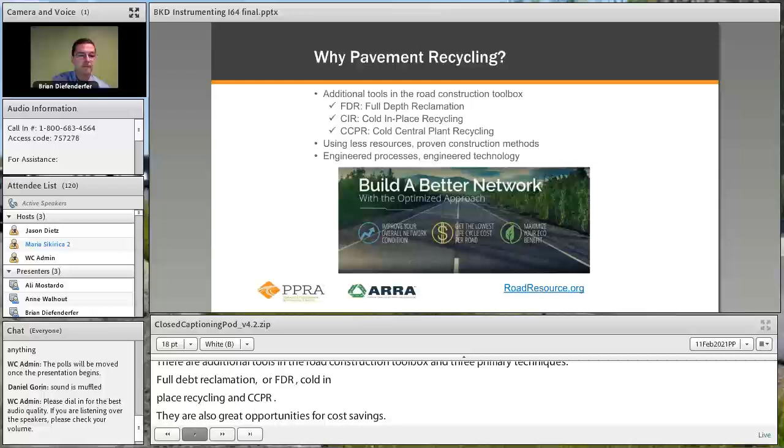As a summary of the three processes: full depth reclamation, or FDR, typically treats a depth of about 5 to 12 inches as a stabilized base layer, and can be used as an alternative to reconstruction. Cold in place recycling works a little thinner, with a typical depth of about 3 to 5 inches, and serves as an alternative to deeper mill and fill and partial depth patching in an asphalt pavement. Cold central plant recycling works in a layer of about 3 to 6 inches thick and can be used as a structural base layer. One thing I'll touch on during this presentation is that cold central plant recycling can be used to help recycle materials into a new roadway, and I'll show some examples of how that has been done.

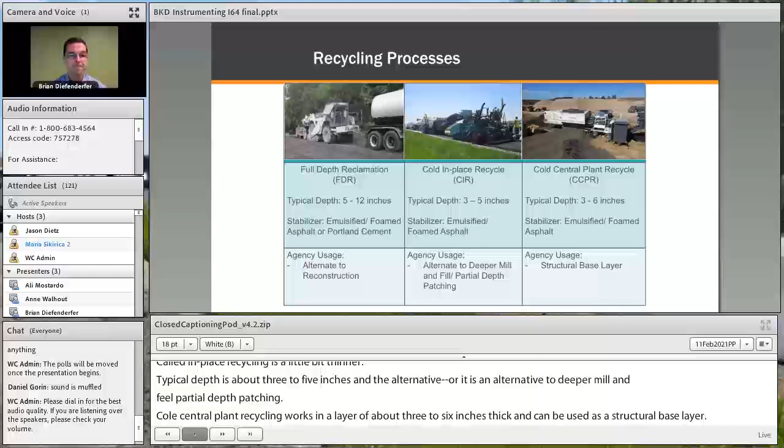Pavement recycling not only can be a cost-effective process, it's also an environmentally sustainable process. Sustainable development has been defined as something that meets the needs of the present without compromising the ability of future generations to meet their own needs.

What comes to mind when we think about this is reusing and recycling material before they're retired. Things we can be mindful of include the environmental impact, the cost, and the performance of these systems. My presentation today will touch primarily on the cost and the performance, but there are certainly sources in the literature that cover all three.

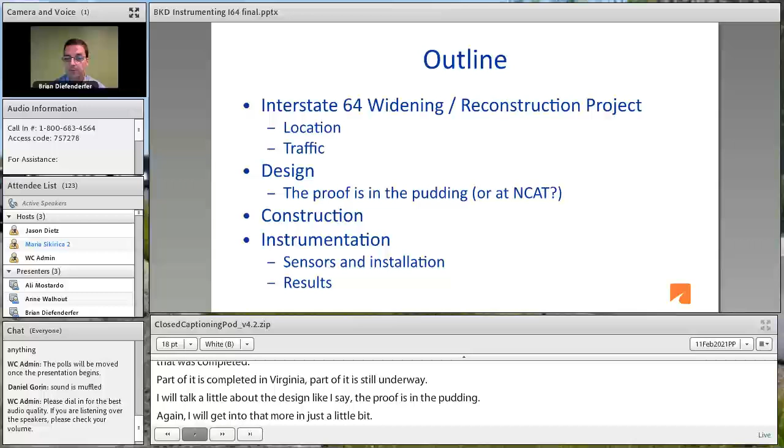A brief outline for today's presentation: I'll be talking about the Interstate 64 Widening and Reconstruction Project, a construction project that was completed in part here in Virginia, with part still underway. I'll talk a little about the design and how we proved the design - the proof is in the pudding, or in this case, at NCAT, the National Center for Asphalt Technology. I'll provide some examples of construction for this project, then talk about instrumentation, the sensors we used, how we installed them, and some preliminary results.

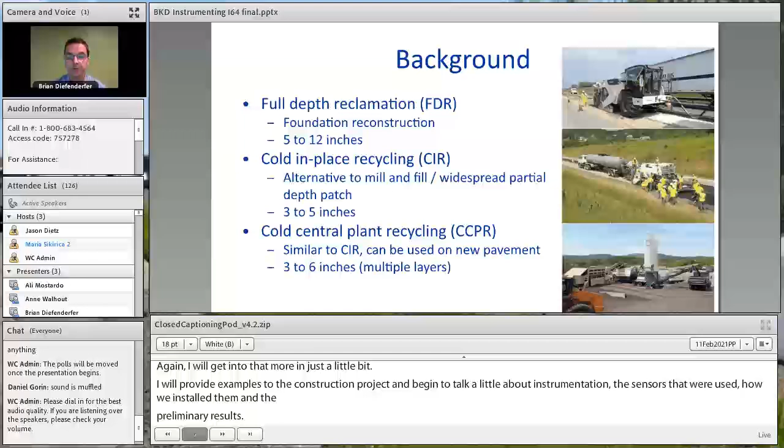As background, FDR, CIR, and CCPR are three recycling processes. I'll be touching more on FDR and CCPR. CIR is also a process that's been used in Virginia. There are many states using these processes in widespread applications, and I'll be going into more of those in a few minutes.

First poll question during the presentation: which recycling processes can be used to create multiple layers? I'll wait just a minute for the results to come through.

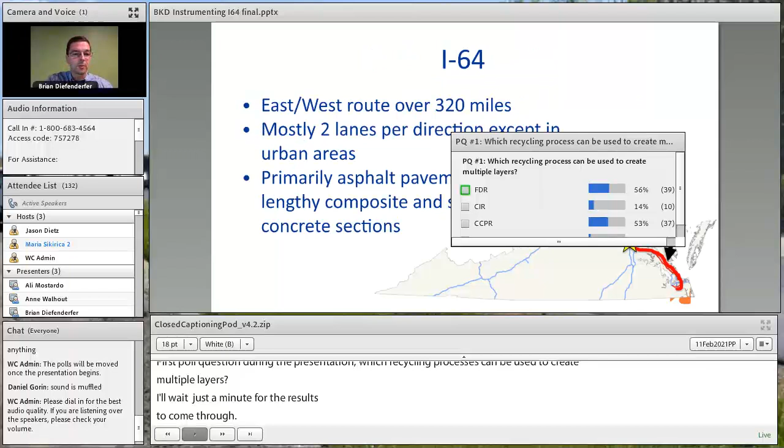Jason, I'm not sure why I'm jumping ahead, but anyway. No, you're good, hopefully everybody will see the results. And it looks like the number one that came in there was FDR for that answer, Brian. So are the slides jumping ahead for you guys, because they are for me? Yeah, they are. Somebody's tinkering with them.

So anyway, in terms of the three recycling processes, I see now there's a majority on the CCPR answer C, and that's the correct answer. CCPR can be used to create multiple layers. Typically with FDR and CIR, the materials are placed in one layer and then a surfacing is placed on top. However, CCPR, since it's paved as a typical asphalt material, multiple layers of that process can be used and then surfaced with an asphalt material.

Poll question number 2, especially for those of you who are an agency, answer for your agency. If you're a contractor, answer for the agency you work with most. My agency uses which recycling techniques the most - FDR, CIR, CCPR, or haven't used any of them? Hopefully not too many option D.

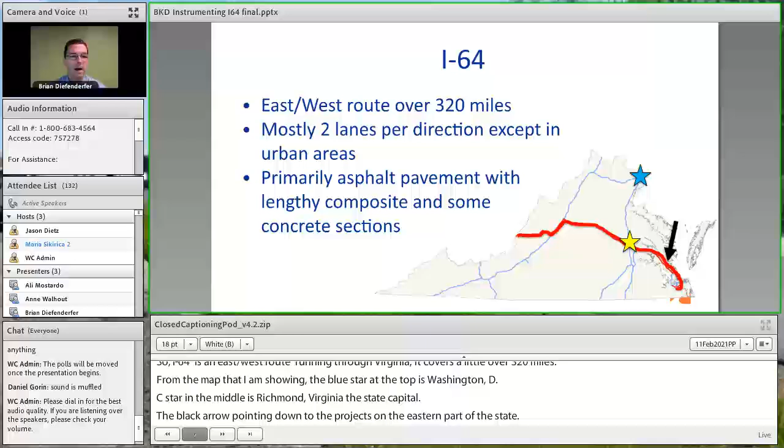I-64 is mostly 2 lanes per direction, except in urban areas where it expands to 4, and in some cases maybe even 5 lanes per direction. It's primarily an asphalt pavement with some lengthy composite sections and a few concrete sections.

The portion that I would like to talk about is locally known as Segment 2. The I-64 widening process was divided up into 3 sequential segments working from the eastern side of the project limits, moving towards the west, towards the Richmond area.

The first project was Segment 1, a 5.3 mile section where a lane was added using conventional construction techniques, and the existing concrete pavement was overlaid with asphalt. That work was completed in late 2017.

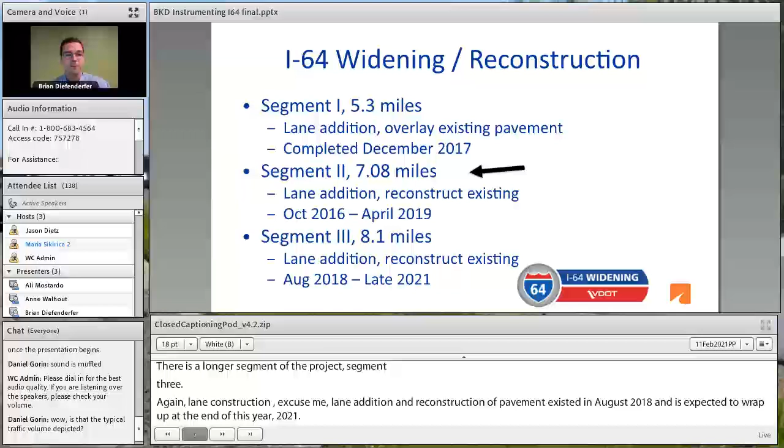Segment 2 and Segment 3 are both what I would call recycling projects. They use an extensive amount of recycled materials and cold recycling processes, including FDR and CCPR. I'll focus more on Segment 2, but the process used in Segment 3 is similar, though the design is not quite the same.

So for the Segment 2 portion of the I-64 project, the location covers Newport News, James City, and York counties, and it's very close to Williamsburg, Virginia.

In terms of the scope of the project, the goal was to add a travel lane and a 12-foot shoulder to the inside of the existing pavement section, and then reconstruct the existing lanes and a full 12-foot width outside shoulder. The project was awarded at a cost of almost $190 million.

In terms of traffic volume, this section carries approximately 44,000 vehicles per day per direction and about 5% trucks.

One of the questions that we posed from the research side is: can we design and build a section of roadway using pavement recycling techniques?

I won't go into much detail here, but this has been discussed by me and others elsewhere. There was a project on Interstate 81 built in 2011 that used all 3 of these processes: full depth reclamation, cold central plant recycling, and cold in place recycling. That project was built successfully, and in fact has very good performance even to this day.

Even this summer will mark 10 years for that project, and we're seeing excellent performance. So yes, we can design and build a section using these recycling techniques.

Can we also use these recycling techniques to reduce costs and reduce the environmental footprint? Absolutely yes to both of those, and there are many examples in the literature. There was recently an article published by Federal Highway showing environmental costs for this I-64 Segment 2 project.

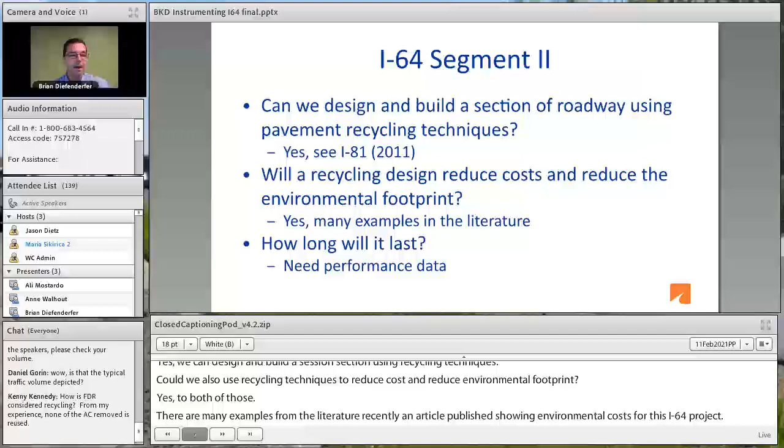I guess one of the main questions we had, even following the I-81 project, was how long will sections built with these processes last? For this, we really need performance data.

One of the things we were able to do to gather this performance data is sponsor 3 sections that were built in 2012 at the NCAT test track. This is NCAT, the National Center for Asphalt Technology, located in Auburn, Alabama, along with Auburn University.

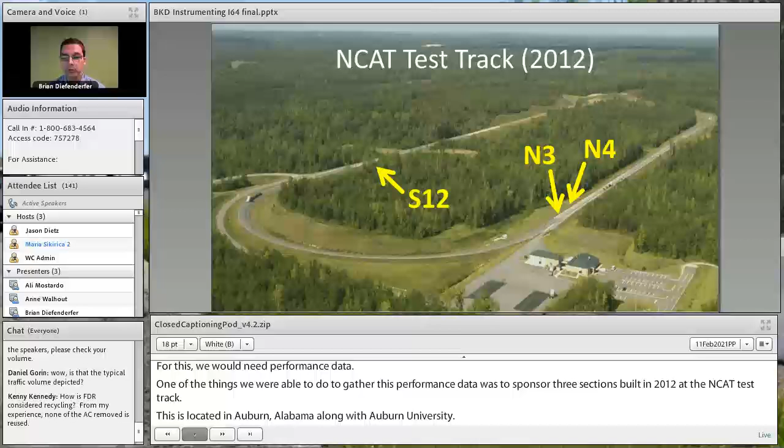The 3 sections that we sponsored were N3, N4, and S12. For the section names, N stands for the north tangent of the track, S for the south tangent, and the number is just the sequential section going around the track.

Section S12 is similar to N4, except for the presence of the stabilized foundation, or the FDR layer. The idea for these sections is that they were instrumented during construction, so we could quantify their performance under trafficking.

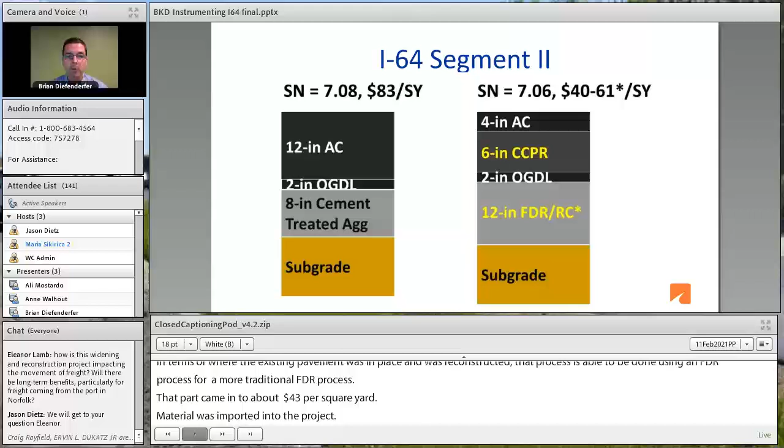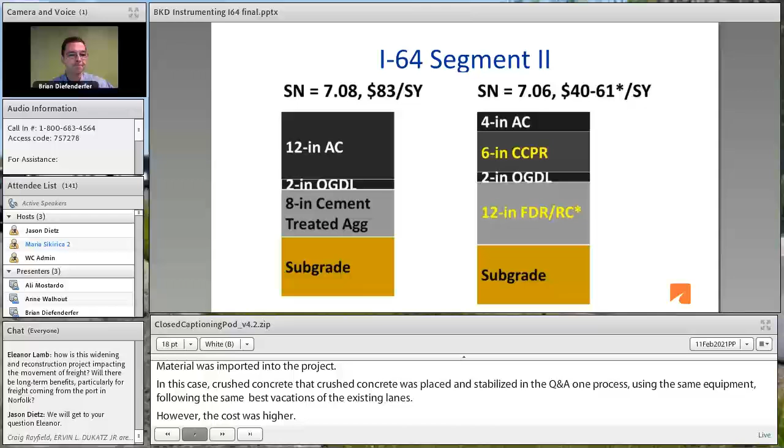Where the new lanes were built, material was imported to the project, in this case crushed concrete. That crushed concrete was then placed and stabilized in an FDR process using the same equipment and following the same specifications as the existing lanes. However, because of having to import material, the cost was higher, at $61 per square yard. Either way, significant savings from the $83 per square yard for the non-recycling design.

So in terms of the recycled design for the I-64 projects, here's a recap of what was done. For the new lanes, imported crushed concrete or RAP was used and stabilized in the FDR process. The contractor had the option to bring in either material, and they chose crushed concrete because it was available locally to them.

A 2-inch asphalt open graded drainage layer was placed on top of the FDR, and then the CCPR was added on top of that. On top of the CCPR was placed 4 inches of asphalt surface, and this is for the new lanes.

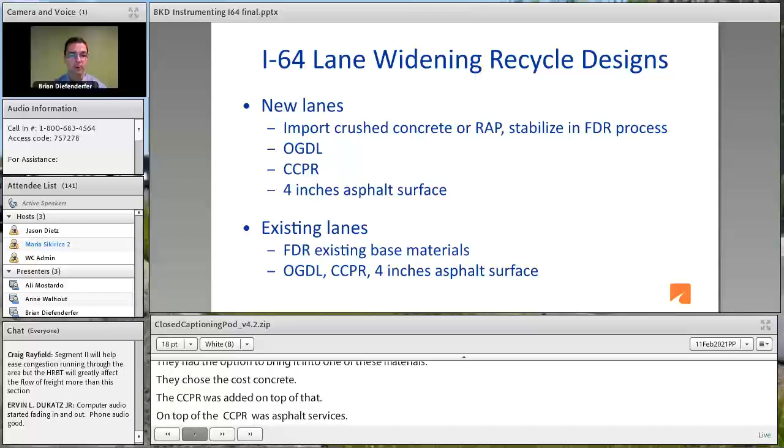Once traffic was shifted over to the new lanes, the existing lanes were addressed, and the existing base materials were stabilized using an FDR process, and then the same combination of OGDL, CCPR, and the 4-inch asphalt surface were added.

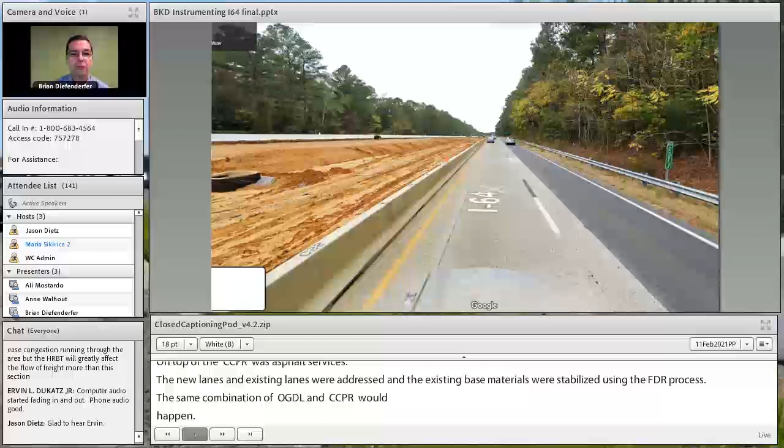I'll walk through a couple of photographs showing the progression of the project. The first photograph shows where traffic was pushed over a little bit to the right, so work could begin on the inside of the two lanes.

Once material was brought into the project to produce the FDR layer, the foundation, the FDR equipment was brought in, shown here doing the FDR process, again on the inside of the new lanes.

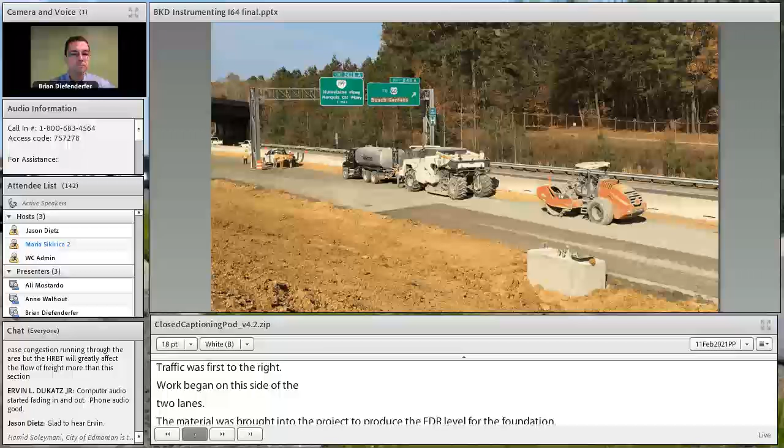Next, the open graded drainage layer was added, which you can see to the left of the pavement equipment. This example is, I believe, during a trial production of the CCPR material. The CCPR was produced at a nearby mobile plant using the RAP that had been stockpiled from the contractors from various plants, brought there, processed, and produced.

The CCPR material was produced, loaded into trucks, and brought out to the job. You can see they're using a traditional asphalt paver. I believe it had a high-density screed on the back, and they were able to place this material.

Because the CCPR design was 6 inches, they placed this about 7¼ inches loose, and then compacted down to 6 inches. But they did place it all as one lift.

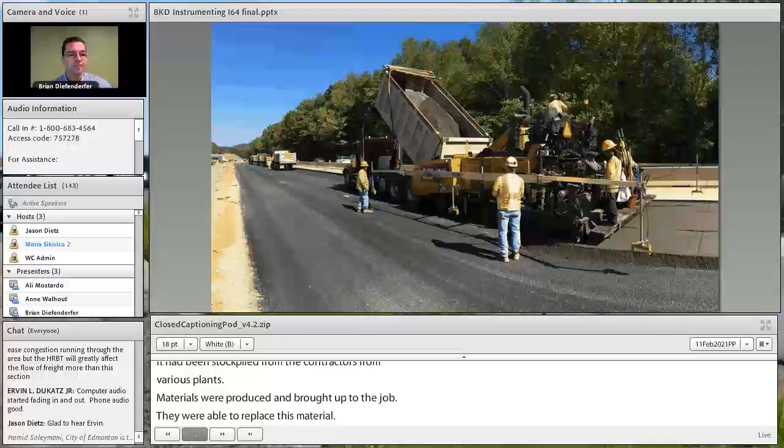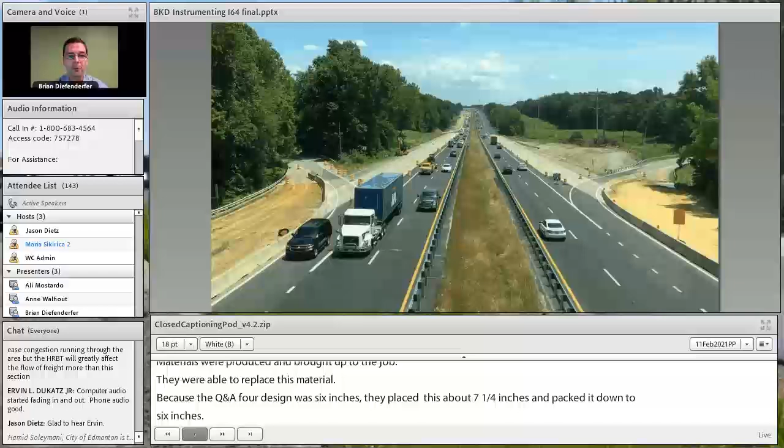After the CCPR was added, one layer of the asphalt overlay was placed on top, so 2 inches of asphalt, and then traffic was shifted over to these new lanes. The photograph shows the 2 sets of inside lanes, that's the recycled material with the imported foundation processed with the FDR, CCPR on top of that, and vehicles running on top of the 2-inch asphalt overlay.

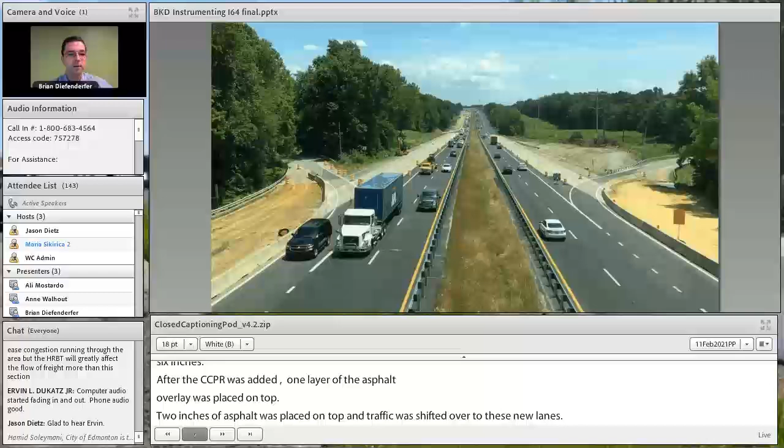After this point, the contractor was able to go through and start work on the outside existing lanes, outside of what's shown here in the photograph.

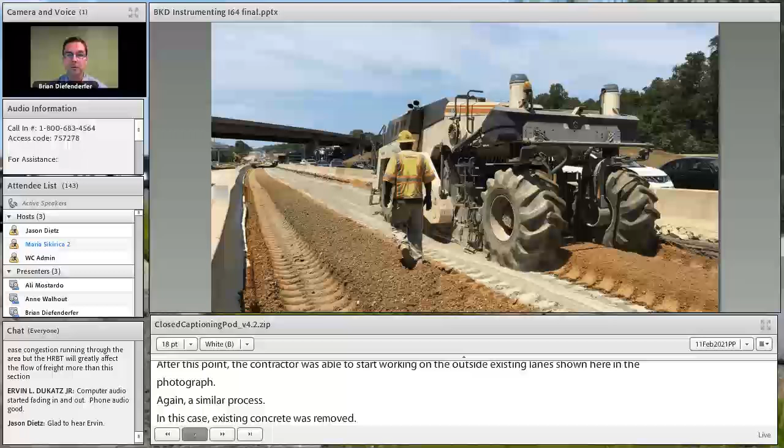Again, a similar process, but in this case, once the existing concrete was removed, the FDR equipment was brought in to stabilize the foundation. You can see on the other side of the Jersey barrier, that's live traffic running, 2 lanes of live traffic running on the recently added lanes. The FDR process was completed.

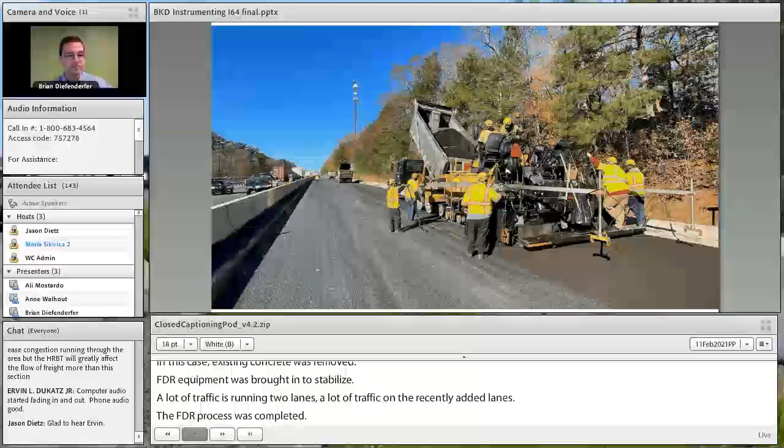The open graded drainage layer again shown here to the left of the pavement equipment, and the same process with the CCPR, where it's trucked to the project and placed in a traditional paver. Again, same thickness for the material.

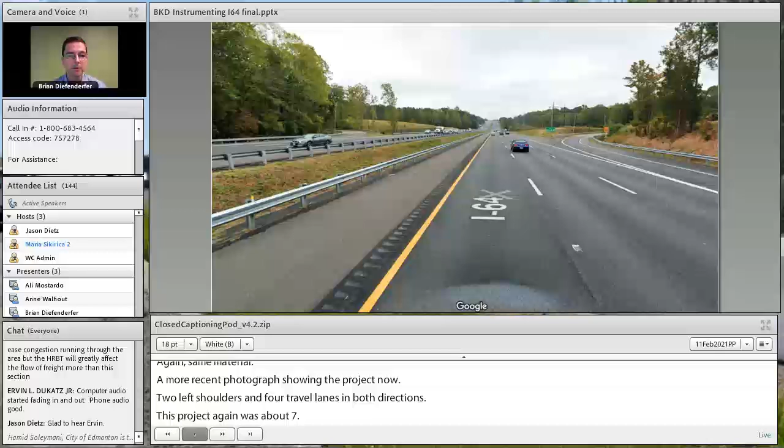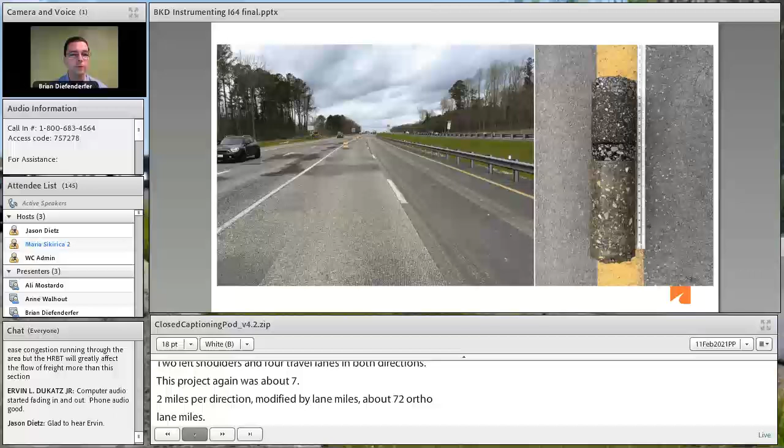One thing we were able to do just before the final overlay was placed, we went out and collected a few cores to make sure everything was holding together and doing as we expected. The photograph on the left is where we took the core, and the photograph on the right is the core that came out.

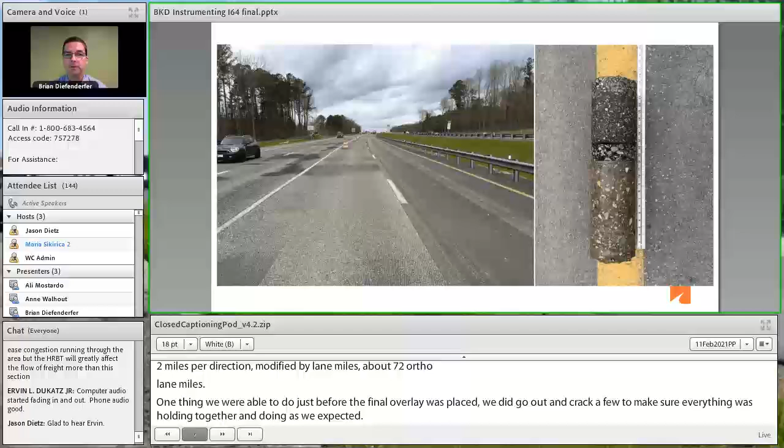Given the size of the core, we had to break it into 2 pieces just to be able to get it out of the ground. So that's about 23 inches of material. You can see the light color gray on the top is the 2-inch asphalt overlay, followed by the CCPR layer with the open graded drainage layer in the middle, and then the stabilized foundation below.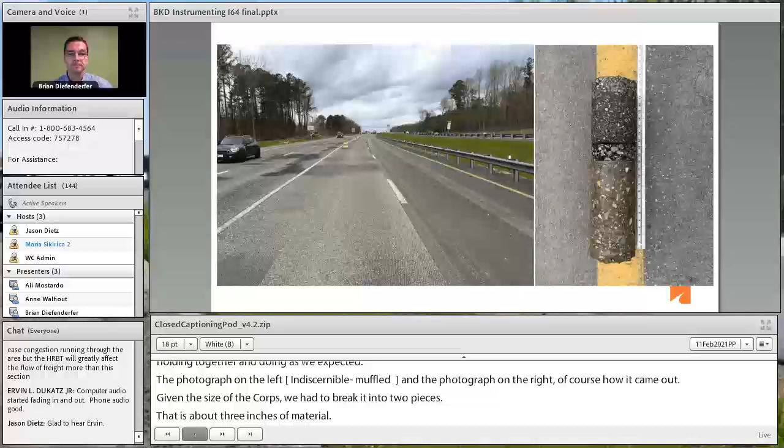One of the things we really want to do is understand how this pavement section is going to perform during its service life. One way is to wait for observation of the pavement section, wait for it to show distress on the surface, but there are things we'd like to know about how it performs under traffic before we see any distresses at the surface. So one way is by instrumenting the pavement, where we can monitor performance during the service life. By using pavement instrumentation, we can measure the response to loading, assess performance during service, and evaluate the design for future projects.

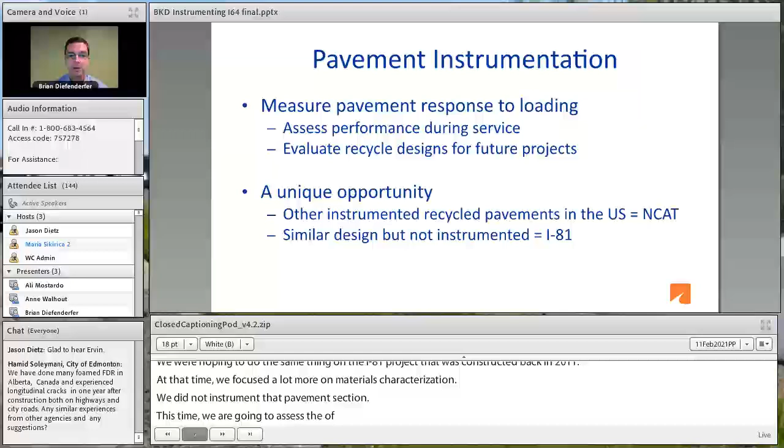We were hoping to do the same thing when the I-81 project was constructed back in 2011, but at that time we concentrated a lot more on materials characterization work, so we did not instrument that pavement section. So now, as we're going through and assessing the performance of that project, we're having to rely on measurements such as ride quality, rut measurements, and falling weight deflectometer testing. However, the pavement instrumentation on this I-64 project will give us a lot more information along the way.

Poll question number 3: how many pavement recycling projects on the interstate system include instrumentation in the U.S.?

It looks like most who are responding are paying attention, and yes, as far as I know, this project on I-64 is the only one. If someone knows of others, I would like to hear about it.

So moving on, this slide shows a plan view of the instrumentation placed on the Segment 2 project. We placed our gauges in 3 lines - the total array was laid out in 3 lines. The dark line across the middle top of the figure is the edge stripe, the right edge stripe of the lane. The direction of traffic is moving from right to left. The intent was that a loaded vehicle would cross the circles, which are the pressure cells, before crossing the eye hatches, which are the horizontal asphalt strain gauges, and then go on to another set of pressure cells. This way we could monitor the performance of the pavement section in terms of pressure, strain, and also temperature and moisture content.

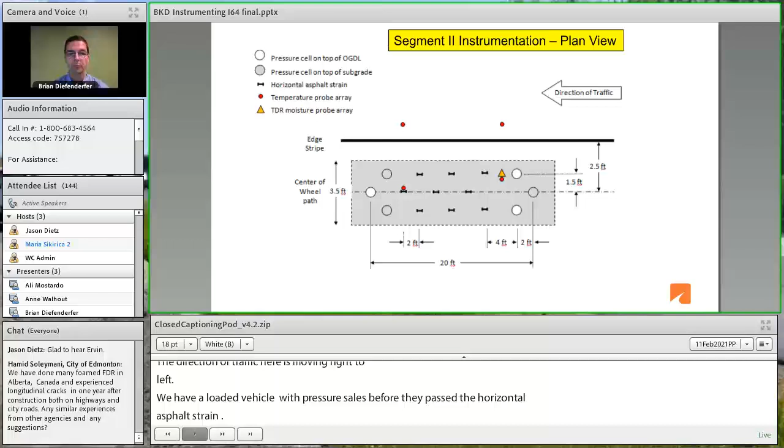The red dots are the temperature probe array, the red dots, and the triangles are the moisture probes.

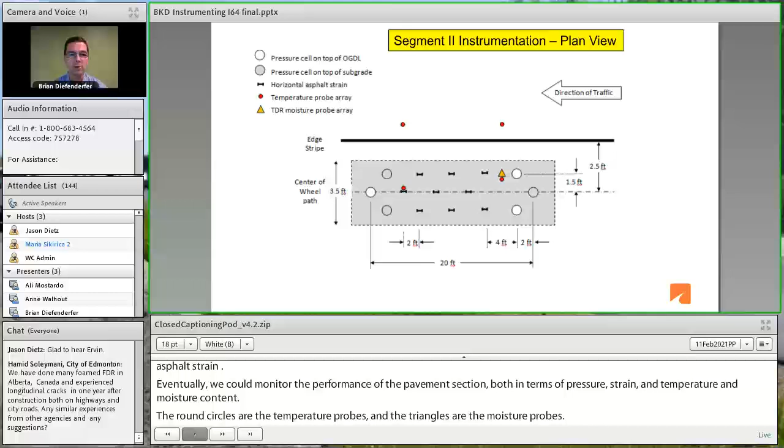A lot of this information on how to arrange the gauges and where to place them, especially with respect to the center of the wheel path, we got from talking with the folks at NCAT and how they instrument their test track. So again, a lot of thanks to them for sharing that information with us.

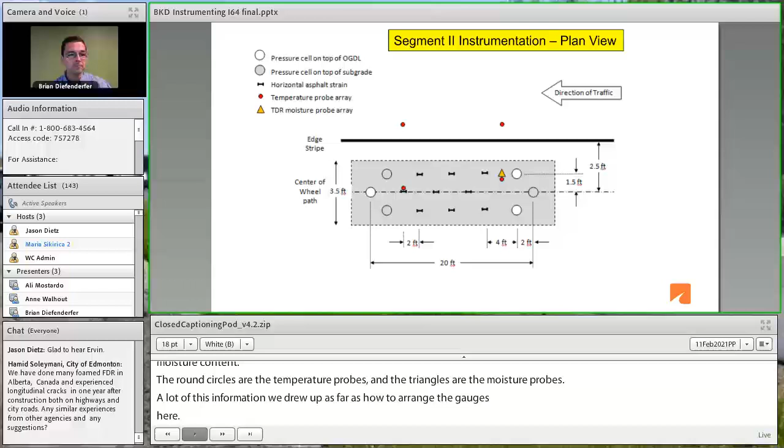So we place pressure cells on top of the subgrade and also on top of the drainage layer, but we place strain gauges at the bottom of the CCPR layer. The OGDL was an asphalt stabilized drainage layer, and ideally we would have wanted the strain gauges at the bottom of that layer, since that's where we expect the maximum tensile strain to be. However, because that layer was only 2 inches thick and the strain gauges are about half an inch thick themselves, we thought there would be problems.

In consultation with the contractor, they were not comfortable with us placing these instruments before the OGDL was placed. So we worked with them and placed the gauges at the bottom of the CCPR layer instead. I'll show in a few slides what we did with that information.

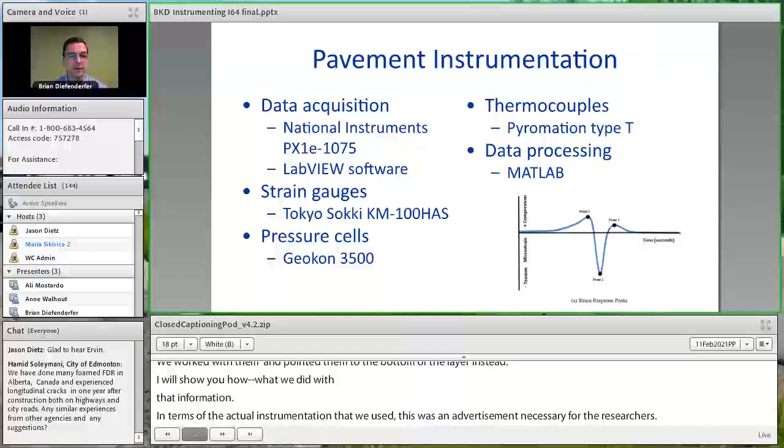In terms of the actual instrumentation used, this isn't necessarily an advertisement for these sensors, but this is what we used on this project, and we've had good success with it on our accelerated pavement test facility as well. The data acquisition was a National Instruments unit using LabVIEW software. The particular strain gauges, pressure cells, and thermocouples we used are shown here, and again we've had good success with those.

The data processing was completed using a custom-built MATLAB routine designed by the folks I work with at the Virginia Tech Transportation Institute. They were responsible for coming out and assisting me with the instrumentation and doing the data collection.

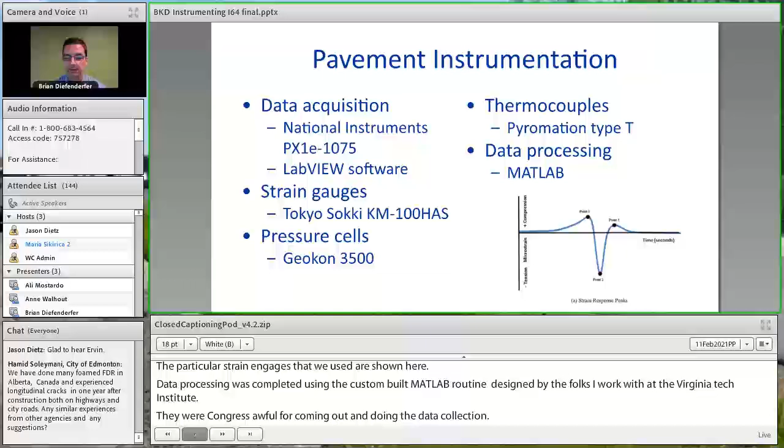An example of the data processing in MATLAB, the figure at the bottom right, is a strain response trace. You can see several peaks showing the compression wave ahead of the load, the tensile response pointing down as the load passes over the gauge, and then a compressive force following that. Each of these points is automatically picked in MATLAB for us to do the computations.

The installation of the gauges was tricky because we were working in a live construction project. Fortunately for this project things were a little easier since we weren't working within live traffic, but we still were working in an active construction zone. So when we did the gauge installation, we divided it into 2 parts. I'll discuss it here verbally and then show a few examples and pictures.

The first part of the installation was after the FDR was mixed, but prior to it being compacted. As the FDR was mixed in the instrumented area, it was excavated in certain places for us to place our sensors. We placed pressure cells and moisture probes on top of, and also 2 feet into, the subgrade. Once the sensors were installed and the wires run out to the side of the road, the material was replaced and the layer was compacted as normal.

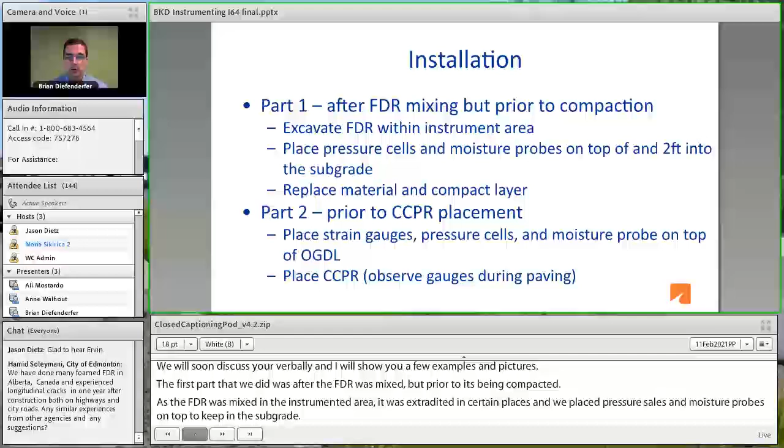After the asphalt open graded drainage layer was placed, but prior to the CCPR, we came back again and placed a series of strain gauges, pressure cells, and moisture probes on top of the open graded drainage layer. Then the CCPR was placed a few days later, and we observed the performance of the gauges during paving.

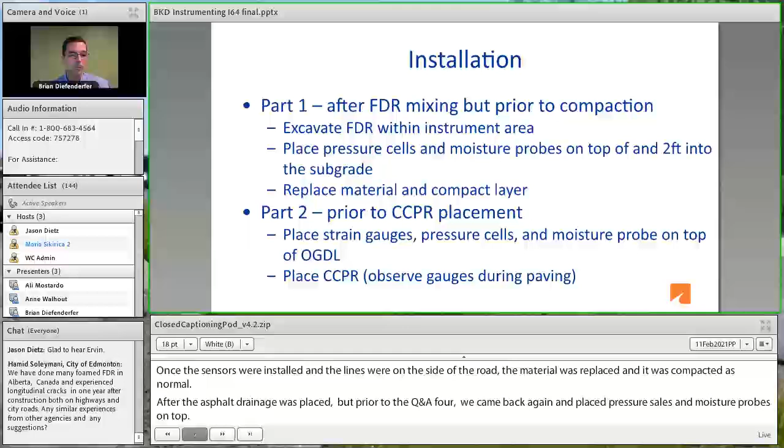We had a lot of cooperation from the contractor here in terms of excavating material, and also when the following layers were being paved. Many thanks to them.

All the wires from all the instruments were collected in a junction box buried along the side edge of the road, buried flush with the grade. One area of concern: if instruments like this are installed with wires coming out in an area where guardrail is going to be located, it's so important to mark the location so the guardrail posts don't sever the wires.

It's several days worth of work to do instrumentation like this, and to have it all go awry if someone puts the guardrail post in the wrong place is a huge disappointment — it would be a big loss, and has been a big loss for us. In this particular location we did not have guardrail, but I'll talk a little in a few slides about another project we did that was behind guardrail.

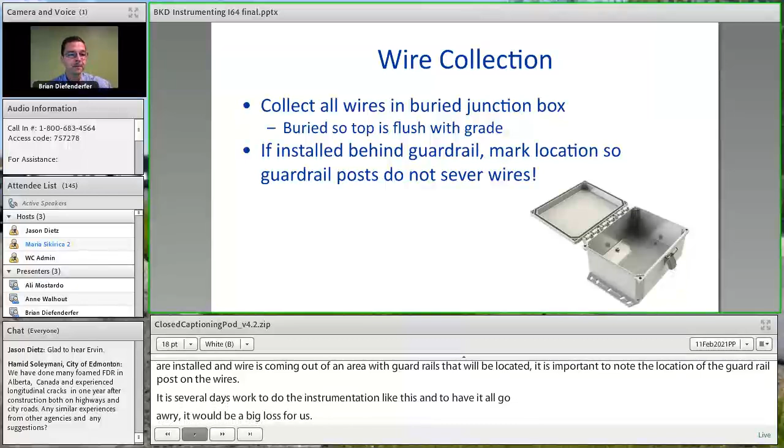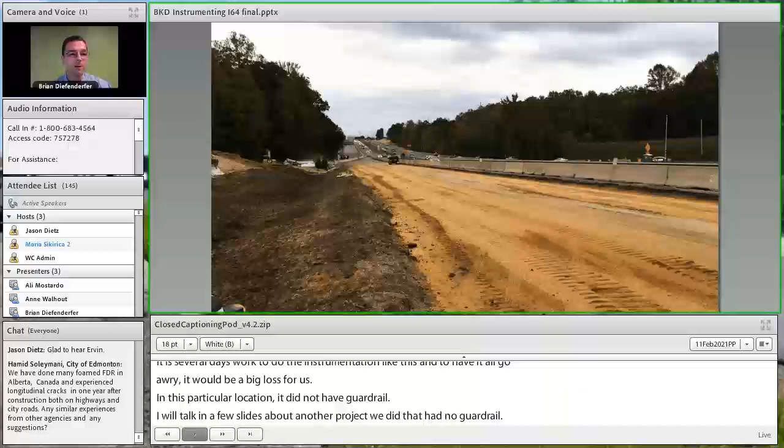So again, walking through some of the photographs of how we did the instrumentation work. This is the grade for the FDR. This is the existing material that will be processed for FDR, where our instruments will be located.

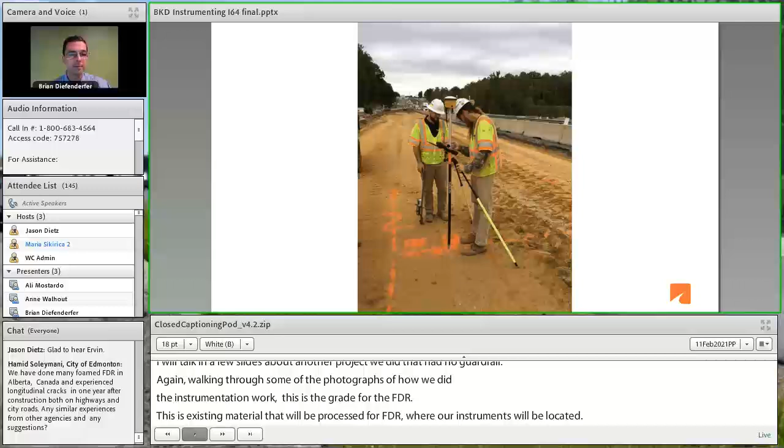We had a survey crew come out with a roving unit, a GPS rover unit, and they came along and marked the approximate locations of where everything would be located, where our instruments would be located.

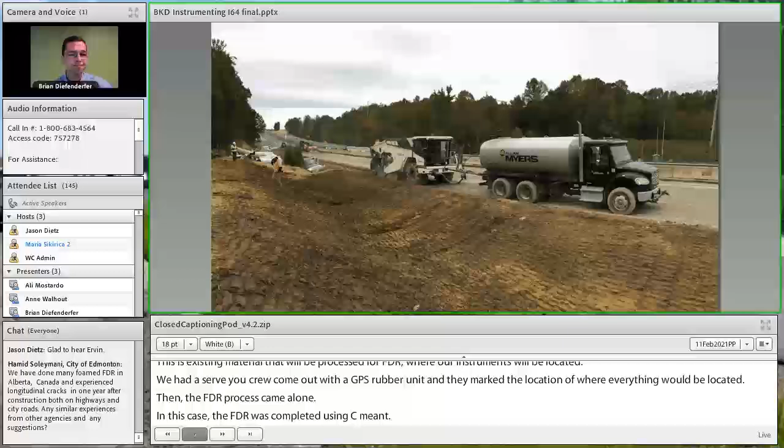And then the FDR process came along. In this case, the FDR was completed using cement. The cement was spread out, again everything done as normal, and then the reclaimer came along and processed, mixed that material to a 12-inch depth.

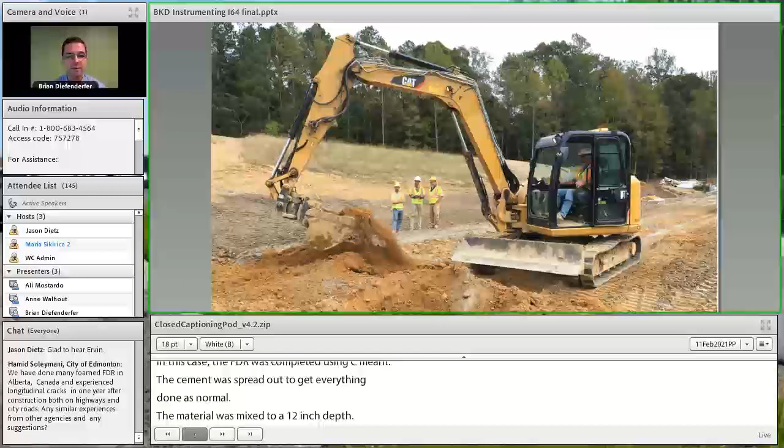Following the mixing of the FDR, and not the compaction, over top the area where we were going to instrument, we had a small excavator come out and excavate the material for us.

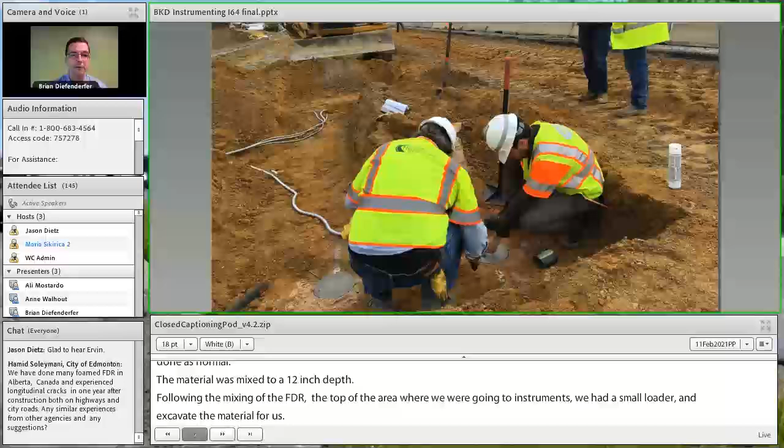The instruments were placed. We had the GPS rover come back, mark final locations for the instruments. The instruments were placed according to the plan that I showed a few slides back, and the wires were run off to the side in a trench to go to the junction box.

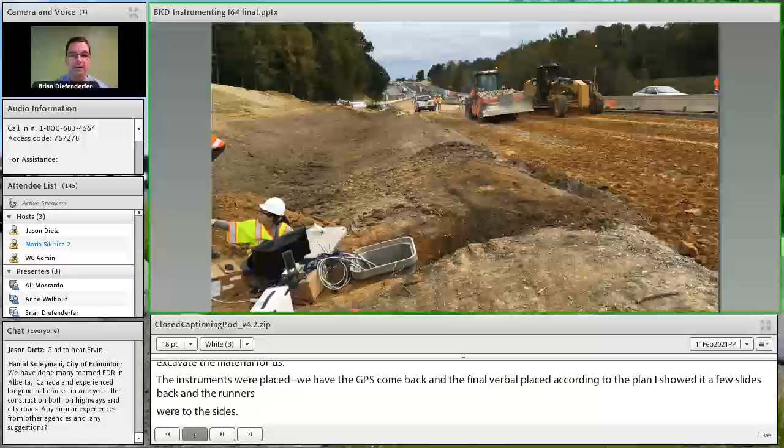Once all the instruments were placed for the FDR, the material was placed back and then compacted as normal. You can see here the scientist from VTTI working with the instruments in the data collection system, working with the wiring in the data collection system as a test as the machinery is moving over top of the layer.

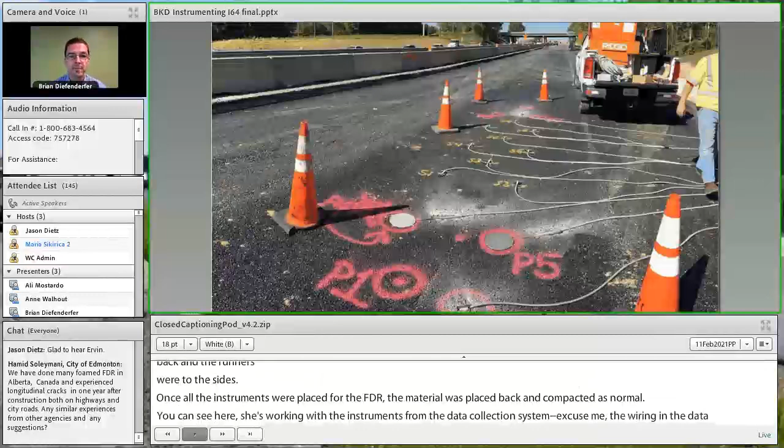After the FDR layer was completed and the open graded drainage layer was placed, we came back for another round of instrumentation. In this photograph, you can see the result—the open graded drainage layer with our instruments on top.

Again, the GPS folks from the contractor with the GPS rover came back, marked the location of the sensors for us, and then we installed our gauge arrays. Towards the top middle of the photograph, there's a series of 9 strain gauges, and the 2 round plates toward the bottom are the 2 pressure cells on top of the drainage layer.

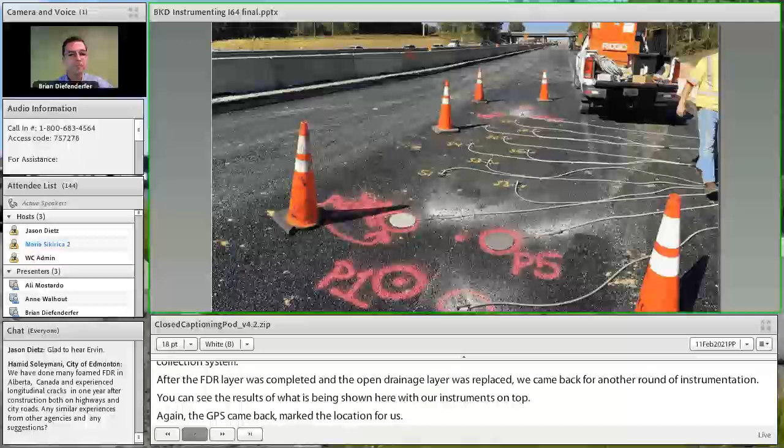A little talk about how we did the actual installation, especially for the strain gauges. The strain gauges really are the most delicate instruments, and ensuring that they stay where we want them during paving, and then also don't get damaged, is something important.

One way we approached this was each wire that came off the gauge was encased in—you can see the flexible metal conduit acting as a protective sheath over the wiring. That was run all the way from the end of the wiring at the gauge all the way to the junction box in that flexible metal conduit to protect the wiring during construction.

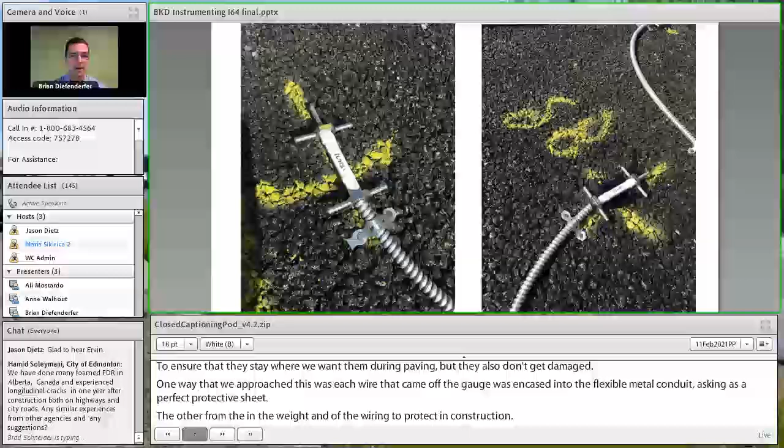Periodically, we cut sections of perforated hanger strap, wrapped it over the wire, and then used masonry nails to secure the hanger strap and the wiring to the pavement surface. Again, we did not want during the paving operation for the next layer for the paver to move these wires around and move the gauges out of alignment and out of place.

Finally, you can see on the photograph on the right side, we added a mixture of hot asphalt binder and sand as a kind of glue to stick the gauge down to the surface of that open graded drainage layer.

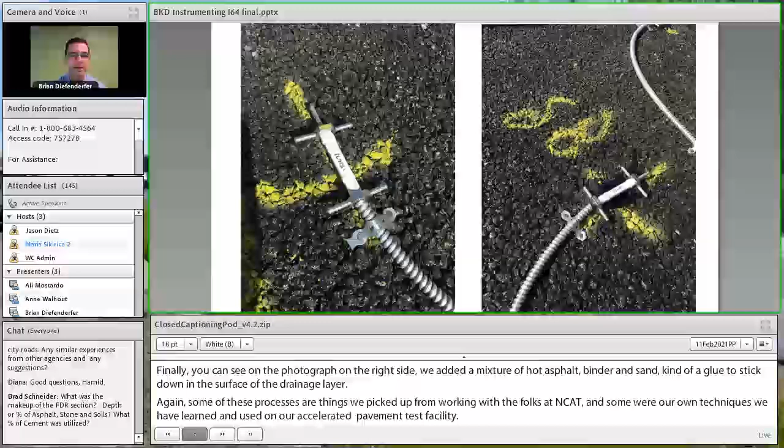Again, some of these processes are things that we picked up from working with the folks at NCAT, and some are kind of our own techniques that we've learned and used on our accelerated pavement test facility. But using these processes, we've had good luck with gauge survivability. So far, if I remember correctly from all the instrumented work we've done, we probably installed maybe 100 or so of these strain gauges, and we've had close to 100% survivability.

After the construction work was completed and the road was finally open to traffic—this is probably about 6 or 7 months after we did the instrumentation work—we used a series of loaded VDOT trucks. We measured with portable scales all the tires around the truck, and then ran these trucks over top, a series of trucks across the instrumented section. We did not have a triggering system to fire up the gauges, but what we did is we ran trucks for about half a day each time we would go out and collect data.

And then we had this camera system set up. Again, since it was live traffic, we really had to have a good way to know when the truck was actually going over the gauge array as opposed to any other vehicle going over top of it. So we had this two camera system: one pointed a little bit upstream of the project to see vehicles coming along, and then the next camera showing the vehicle going over top of the instrumented section. That way we can go back in the data, and by comparing the timestamps from the camera and the data collection, we can know exactly which vehicle was going over top of it. So it was important to coordinate and synchronize the clocks on those two sets of equipment. But this is how we were able to do the work.

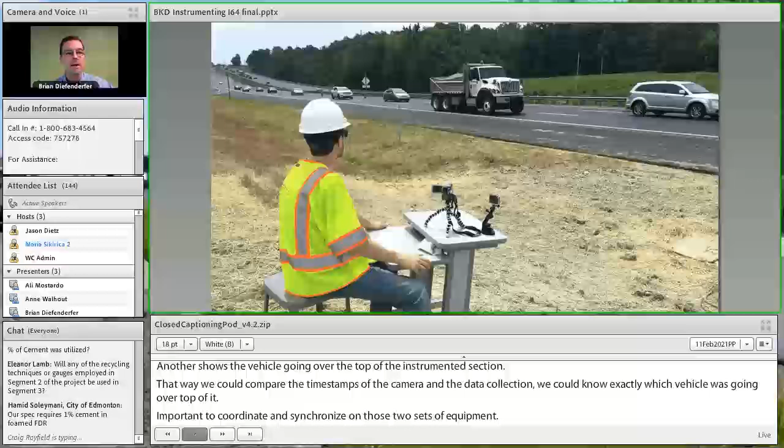So again, the section was open to live traffic. Everybody was driving over who could. And then we had our fleet of VDOT trucks loaded to the known weights.

As I mentioned a little bit ago, the strain sensors were placed at the bottom of the CCPR layer, but ideally we'd like them at the bottom of all the asphalt layers, which would put it at the bottom of the open graded drainage layer. Through the construction process, we were not able to do that, but the way we actually calculated the strain at the bottom of the open graded drainage layer was by developing a layered elastic model, where we modeled the strain at the bottom of the CCPR layer and compared that to the strain we actually measured using the sensors. We adjusted the model inputs to minimize these differences or minimize the error, and then used that model to calculate the strain at the OGDL, the bottom of the OGDL layer, or the layer of interest.

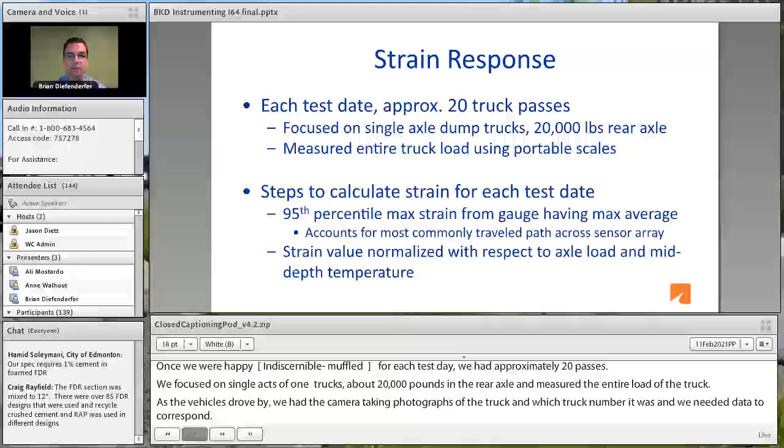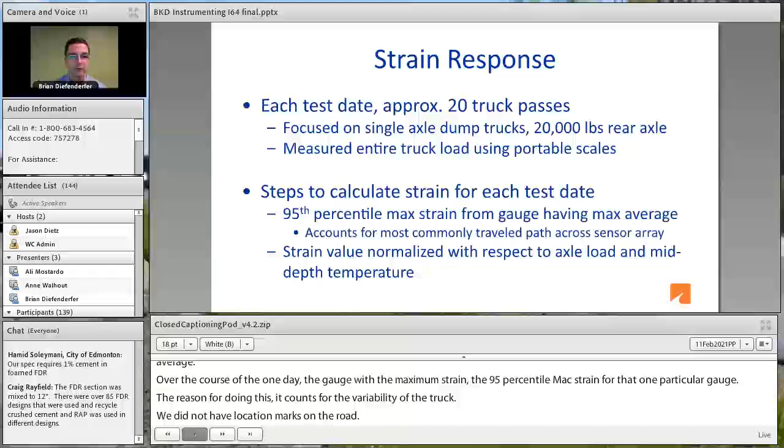So to calculate the actual strain for each test date, we took the 95th percentile maximum strain from the gauge having the maximum average. So again, thinking there was a sensor array of 9 strain gauges, over the course of one day, the gauge that had the maximum average strain, we took the 95th percentile of that strain from the multiple passes for that one particular gauge. The reason for doing this is it accounts for the variability of the truck as it travels across that array. We did not have location marks on the road, so we were asking the trucks to try to maintain positional alignment as accurately as they could, but it's still difficult when traveling at highway speed. We also normalized the strain value with respect to the axle load and also with respect to mid-depth temperature.

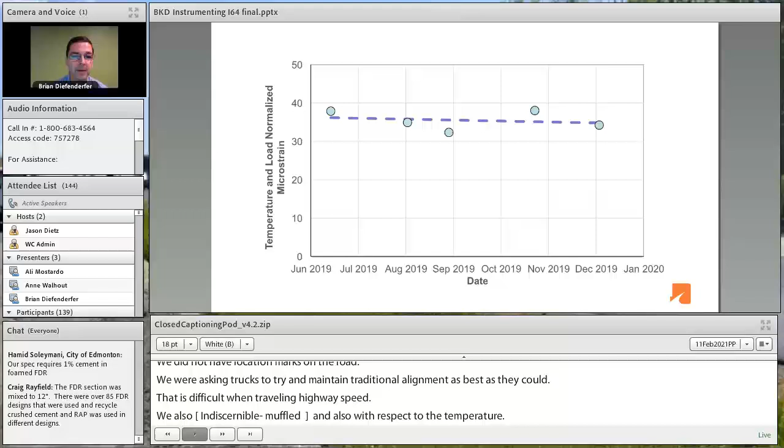So here's an example of the temperature and load normalized strain for the various test dates that we took. One of the things I found maybe most interesting with this, and this correlates well to some FWD testing we have taken on some other sections, is that you can see the trend of the strain is that it's decreasing with time. And this is something we expected to see with continued curing of the recycled material.

Again, the trend was we saw a decreased strain with respect to time, which we expected. There is some variation in the strain, which we think is mainly due to positional alignment of the vehicles, which is difficult to control from live traffic. This is the strain at the bottom of the CCPR layer, and you can see here the average is maybe about 36 or 37 microstrains. We expect it to be a little higher at the bottom of the OGDL layer because the maximum strain happens at the bottom of the asphalt layers. However, this is still a very low strain value.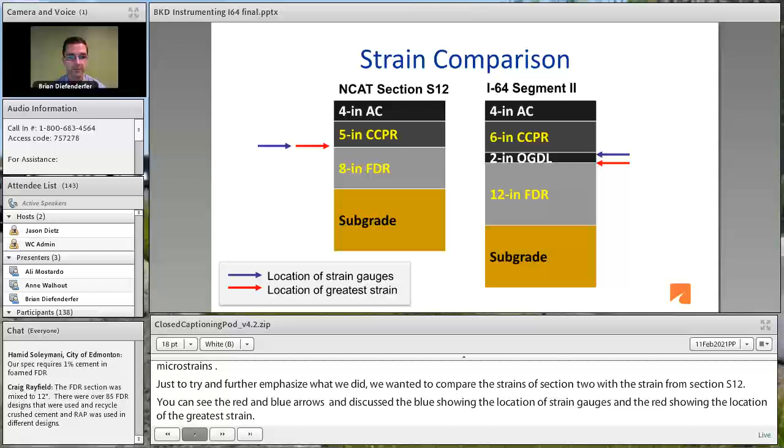To further emphasize what we did, we wanted to compare the strain for the Segment 2 section on I-64 with the strain measured at section S12 at the NCAT test track. At the NCAT test track, you can see the red and blue arrows. The blue arrow shows the location of the strain gauges, and the red arrow shows the location of the greatest strain. For the NCAT test track, those were in the same place, at the bottom of the CCPR layer. But for Segment 2, the location of the strain gauges and the location of the greatest strain were in two different places, and we used modeling to account for that. Just looking at the two cross sections, we would expect the strain to be less on the I-64 section simply because it's a much thicker pavement structure.

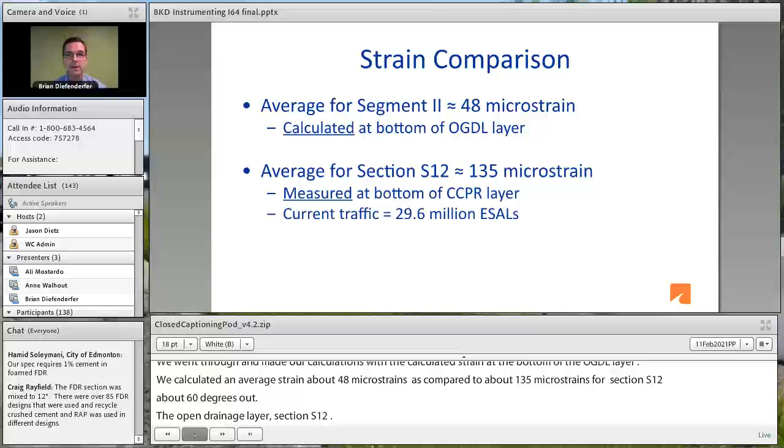We went through and made our calculation. The calculated strain at the bottom of the OGDL layer through layered elastic modeling gave us an average strain of about 48 microstrains, as compared to about 135 microstrains for section S12, the average at about 68 degrees Fahrenheit. So again, the 48 microstrains is a calculated strain value at the bottom of the open graded drainage layer, whereas for section S12, the 135 is a measured value at the bottom of the CCPR layer. The section at S12, the NCAT track, is approximately close to 30 million ESALs at this point. So we really expect, especially given the low strain value of Segment 2 for I-64, to see a very long service life for that pavement section, especially with respect to strain performance.

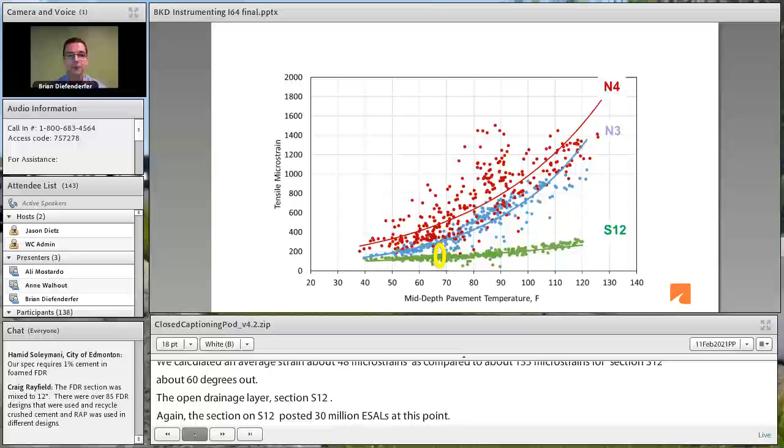A quick recap of the data I showed previously for the NCAT test track, and where I took the 135 microstrains from: the section strain data for section S12 at approximately 68 degrees Fahrenheit.

Here's a summary of the I-64 Segment 2 pavement design. I want to highlight the amount of recycled material used on this project, which was a little over 7 miles in each direction. In terms of the FDR work on the existing lanes, it was about 345,000 square yards. The cement-treated concrete/RAP for the new lanes, also treated with an FDR process, was about 146,000 tons. The project used almost 170,000 tons of CCPR, which came primarily from stockpiled RAP located in the state. Overall, for this entire project, more than 500,000 tons of material was recycled, and we calculated an estimated cost savings of about $10 million.

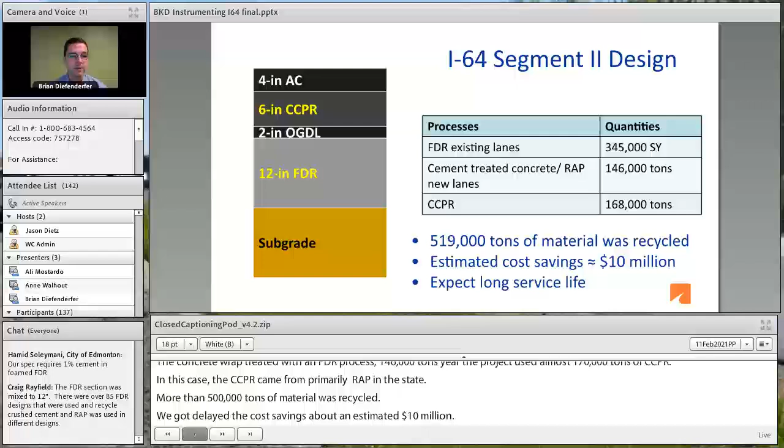Given the large amount of material that was recycled and the high cost savings for this project, we really consider this project a success. And looking at the strain data we're collecting, we really expect a long service life from this pavement section.

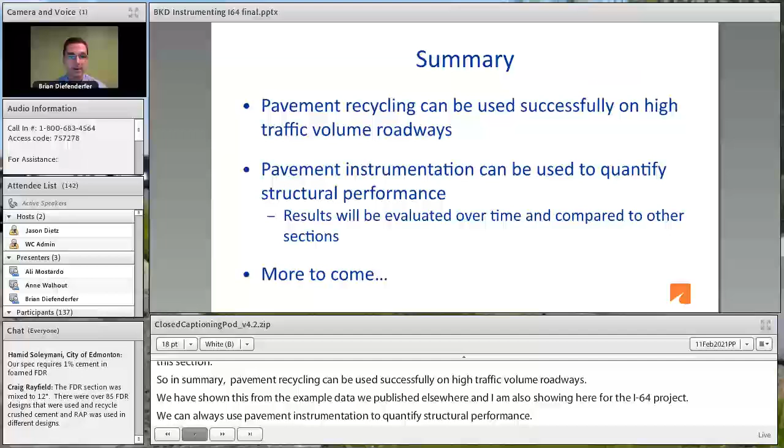In summary, pavement recycling can be used successfully on high volume traffic roadways. We've shown this from the example data published elsewhere for the I-81 project, and what I'm showing here for the I-64 project. We can also use pavement instrumentation to quantify structural performance. For this project, we'll be evaluating results over time, comparing early and later results, and also comparing these to other sections, especially the NCAT test track. We expect more information to come from this over time.

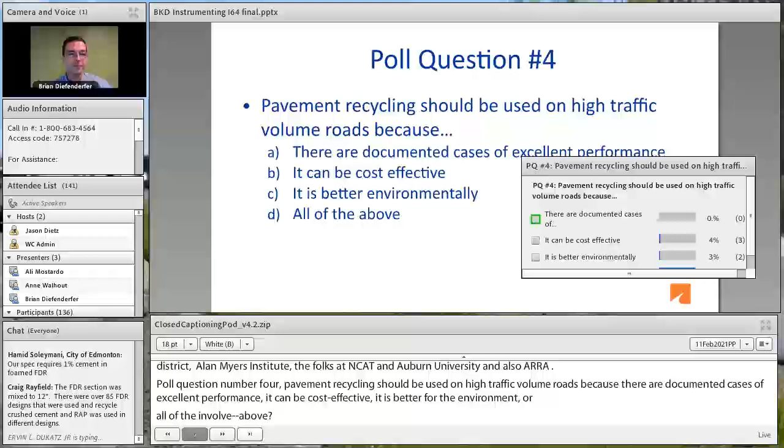And looking at the responses, almost 100% said all the above. I hope that's a huge takeaway from this presentation, all the above.

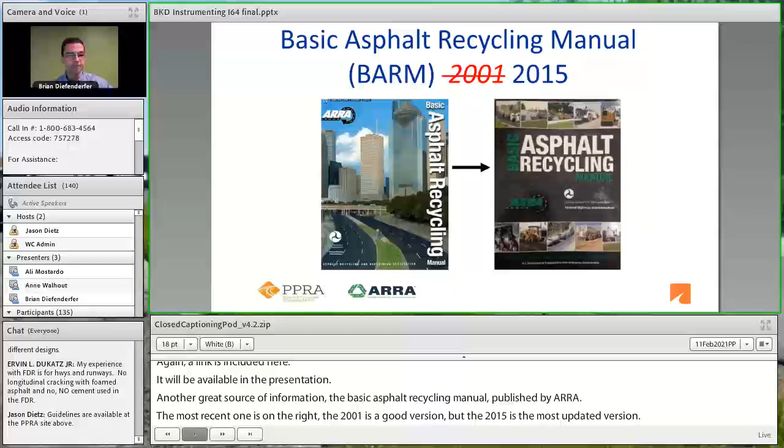Another great source of information is the Basic Asphalt Recycling Manual published by ARRA. The figure on the right shows the most recent copy, the 2015 one. The 2001 version is good, but the 2015 one is updated and has a lot of great information in it. I encourage you to locate that document, and if you don't have a copy locally, you can get a hold of an ARRA contractor and they can supply those for you free of cost.